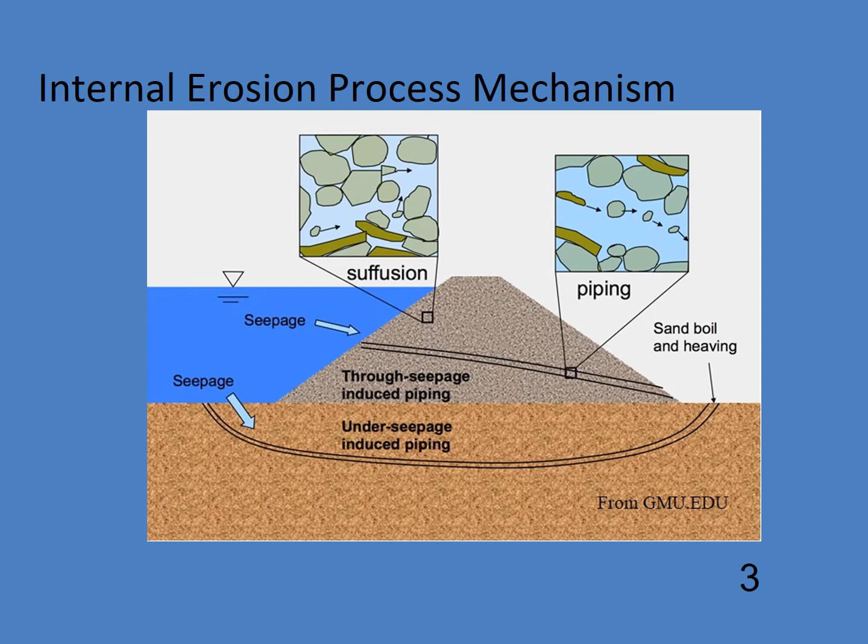Even though piping starts at the micro scale, if the problem is left unattended, the consequence is not ignorable. As you can see, it eventually causes serious damage to the dam structure, even total dam structure failure.

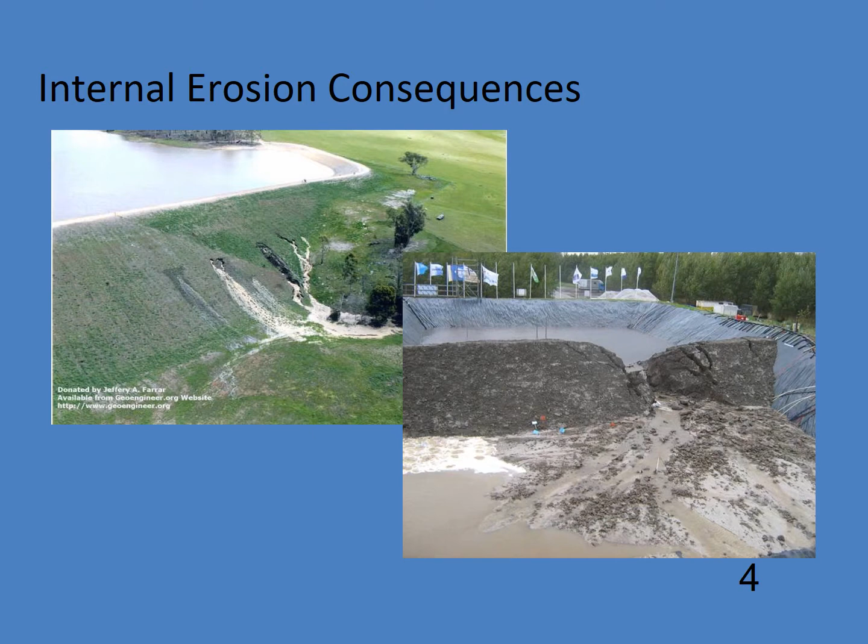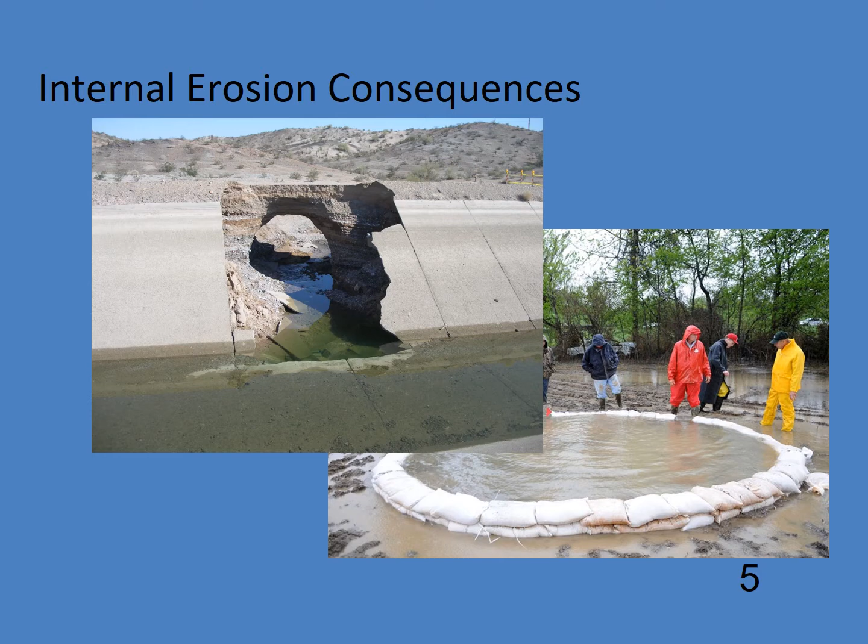Piping problems are also feasible underlying the alluvial soil strata, which eventually causes significant impact on the stability of the dams. So if you find some puddle or boiling situation at the toe area of a dam, you should take immediate investigation over the piping process.

So what material properties impact internal erosion? Piping starts from suffusion, and suffusion is also called the self-segregation process. Those processes relate to the particle size distribution and the relative density of the site soil.

From those two input parameters, you can calculate the constriction size and the maximum conduit size, in other words, the piping flow channel size. From comparing the erodible particle size and the conduit size, you can calculate how much particle remains and how much fine particle is eroded out after the piping process. I'm going to explain the definition of constriction size and maximum conduit size in a later slide.

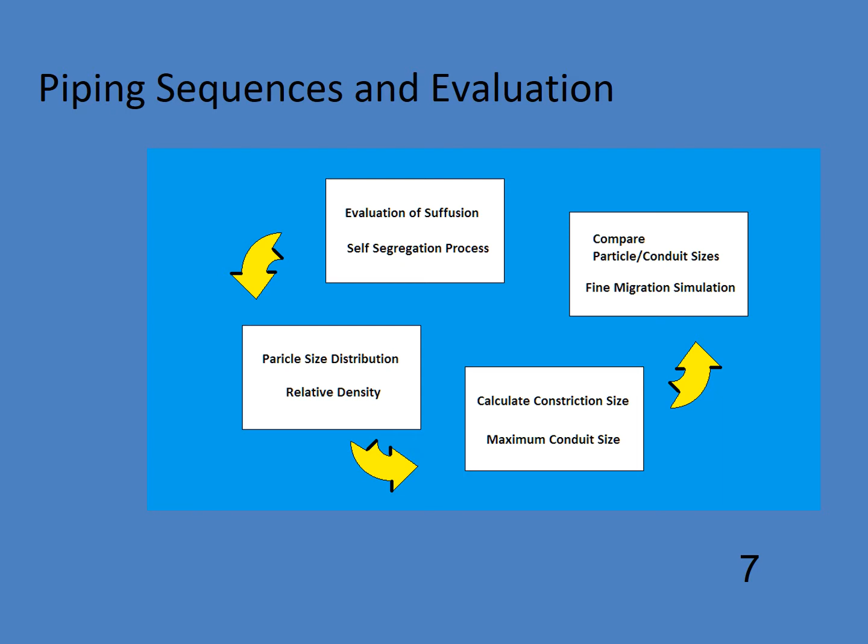In 1985, Kenney and Lau suggested design criteria for how to estimate internal soil stability. They proposed the criteria H equals 1.3 times F, where H is defined as the difference of a fraction corresponding to 4 times D and the diameter D.

As you can see in the green and orange gradation curves, that relationship can be plotted in the F-H diagram, and F and H are consistently above the 1.3 times F criteria shown in the red line. However, the blue gradation curve, which is a better graded grain size distribution, shows that F and H fall below the criteria at a fraction above 15%. So this blue gradation curve represents what we call internally unstable soil.

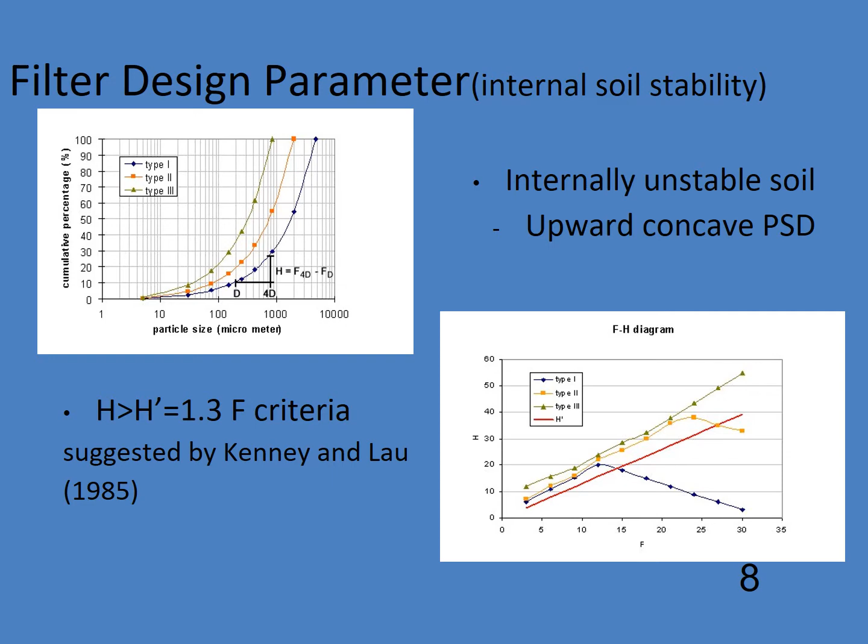Kenney and Lau proposed this criteria based on their laboratory tests on many non-cohesive type soil gradations. From the right-hand side graph, the F-H diagram result consistently shows that relationship is always above the 1.3 times F criteria.

However, internally unstable soil falls below that criteria. I want to make a note that their test was always performed under densely compacted conditions, so we need to figure out a methodology for how to evaluate internal stability for loosely packed conditions.

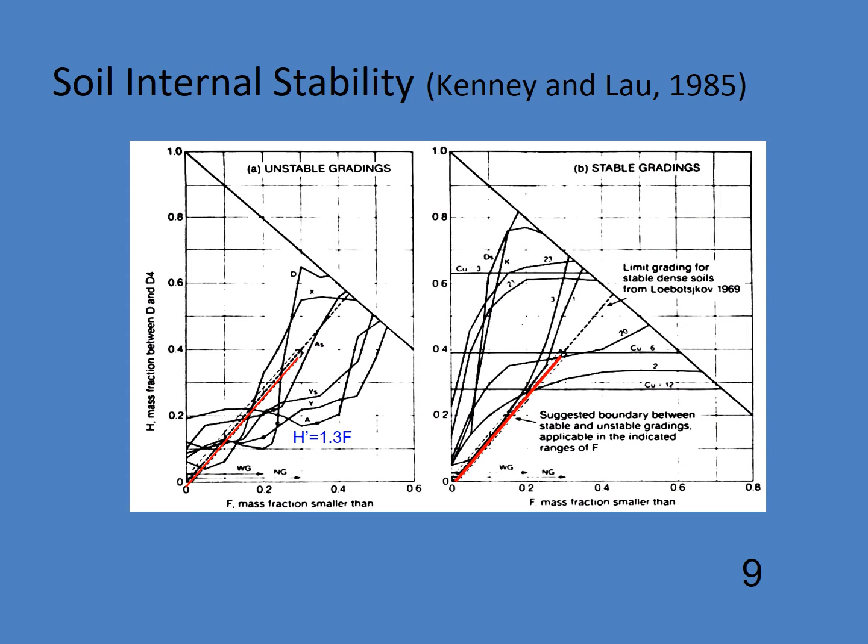Relative density is another important parameter to be considered in piping risk assessment. When you build an embankment dam on the rock abutment side area, the new embankment will start settlement from the lower portion of the dam due to its own self-weight. But the crest zone of the dam area will be sustained by the supporting bridging impact from the abutment rock slope.

So what happens in the middle zone if the top portion is sustained but the lower portion settles down? The middle portion will be susceptible to piping flow channel generation because the relative density is decreased.

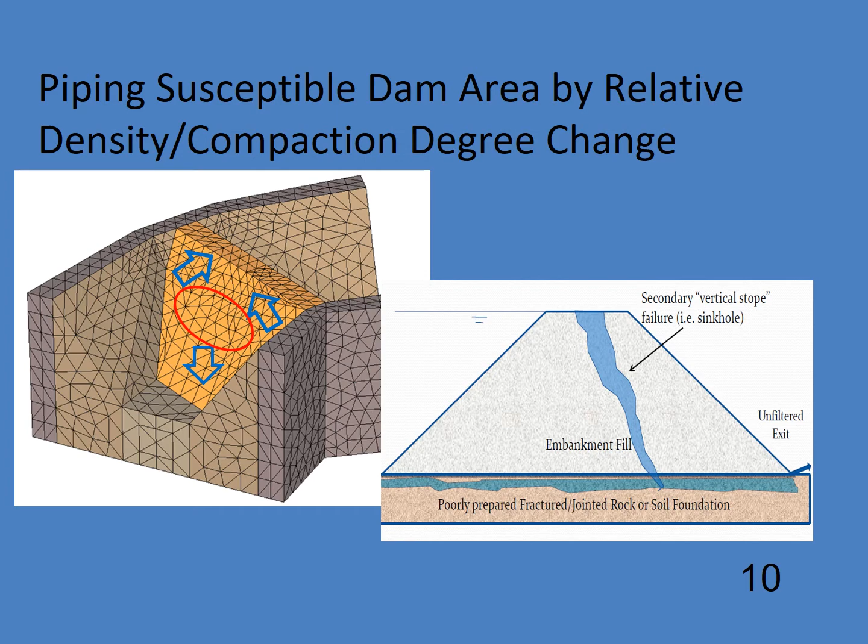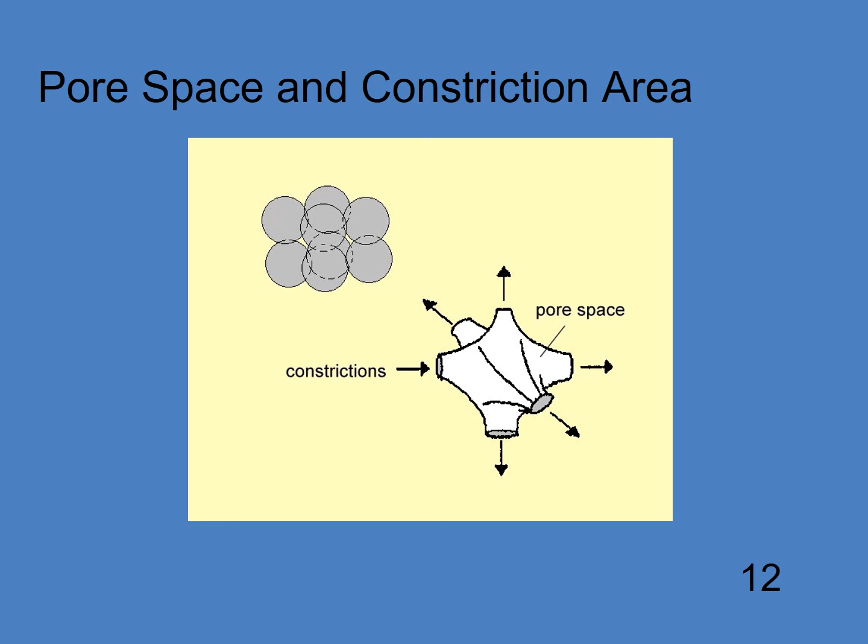So how to derive the constriction size distribution from the soil particle size distribution? The first step is to evaluate the effective particle size distribution, which is closely related to describing the constriction size of the pore structure.

You need to take an integral of 1 over x, where x is the particle size, powered by beta. The exponent beta value ranges from 0 to 3. Beta equals 0 means the mass-based particle size distribution, and beta equals 3 means number-based particle size distribution.

A Swedish researcher investigated through laboratory testing and found the closest beta value describing the constriction structure of the pore. From his study, he concluded that beta is close to 1.

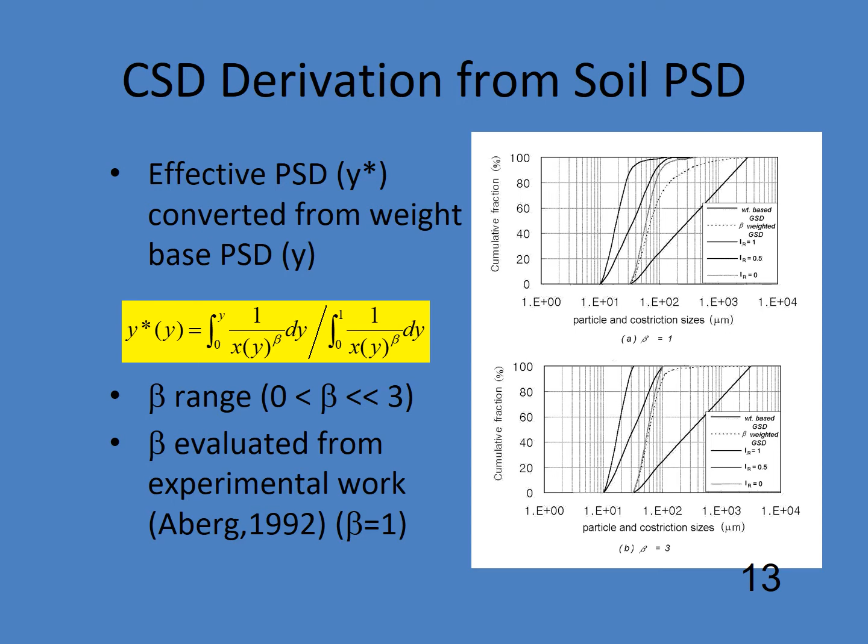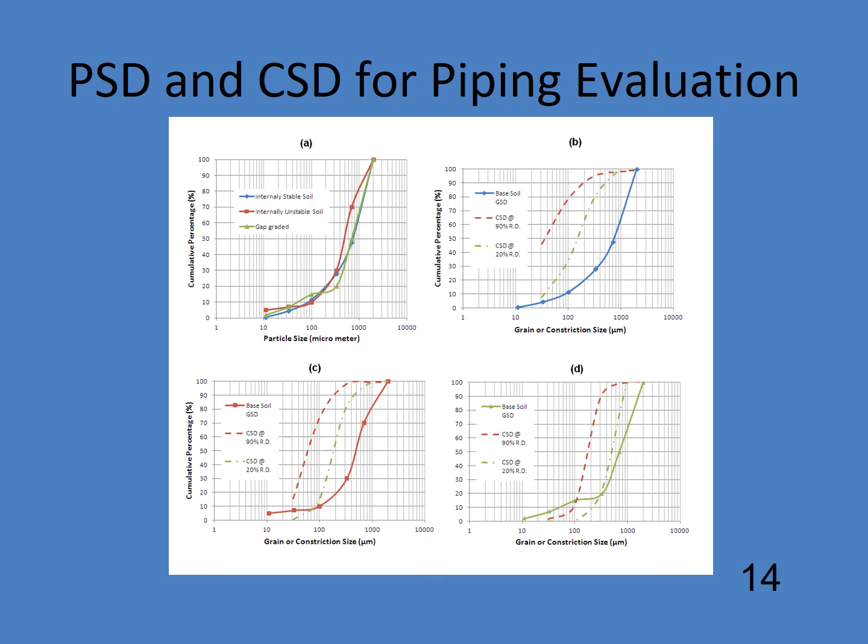For the passing probability analysis, you can estimate the piping flow channel size. If you have these types of solid line particle size distribution curves, you can derive a constriction size depending on the relative density, and estimate from the constriction size curve the matching 20%, 28% of corresponding constriction size that will produce the piping flow channel size.

Each case corresponds to densely compacted and loosely packed conditions. The loosely packed condition definitely shows much larger fine particle migration happening after the piping process.

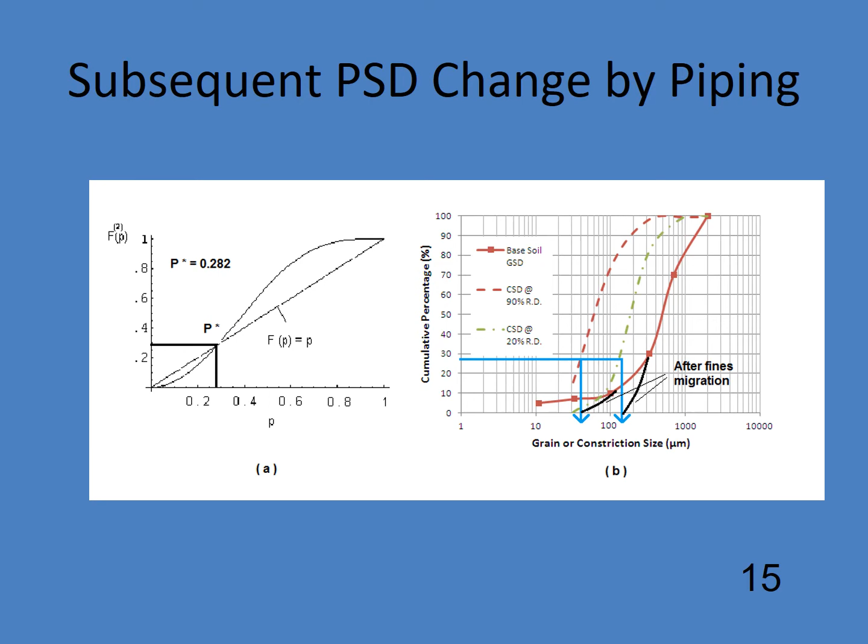We can call the suffusion in the micro scale as piping, because piping is a continuous process of development, enlarging in size and developing from the downstream to the upstream.

So we should investigate whether this fine particle migration is successfully progressed as the analysis domain is increased.

Even though suffusion started from the micro scale in the pore structure unit, it depends on the accessible constriction locations, and this determines whether this fine particle migration is successful or whether it will stop.

From the renormalization technique, we can evaluate the piping continuation probability. So bottom line, we need to find out the scale invariant effect of the pore structure to associate it with piping development.

From that study, we can evaluate that the critical piping flow channel size corresponds to 28% of the cumulative constriction size.

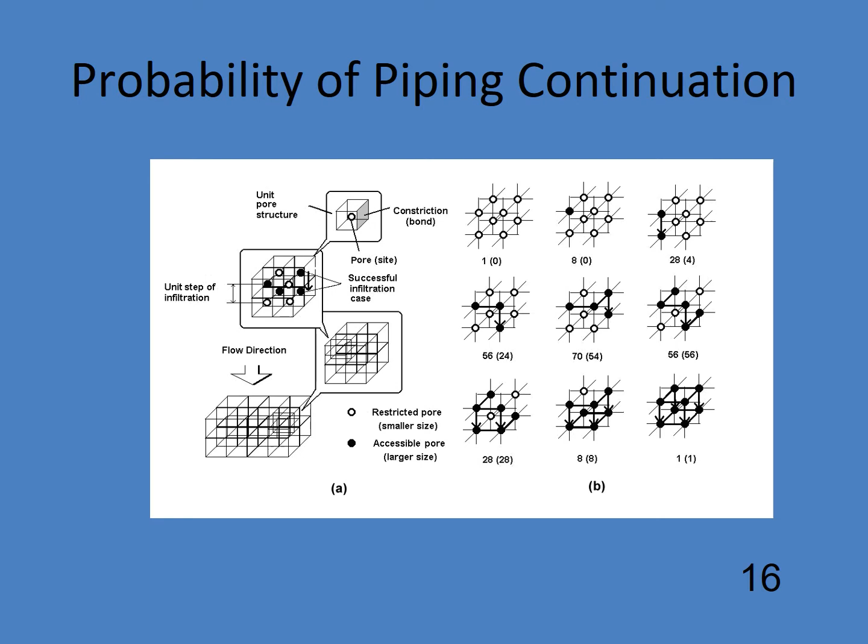From now, I'm going to briefly show the program. From this probability model, we can estimate constriction size and compare it to the original particle size curve, to calculate the fine particle mass fraction eroded out from the piping process.

This is the first example I'm going to introduce. This program has two input sections: one for the base soil grain size distribution, and the second input section is for the sieve size. The sieve has a percentage opening area and also its opening size itself.

First thing is to make it 0, meaning your sieve is closed, so you just examine the self-segregation process. No fine particle is allowed to pass through that sieve. You can erase that and plug in any number, depending on the passing curve, and generate the curve, eventually getting the constriction size distribution from the calculation.

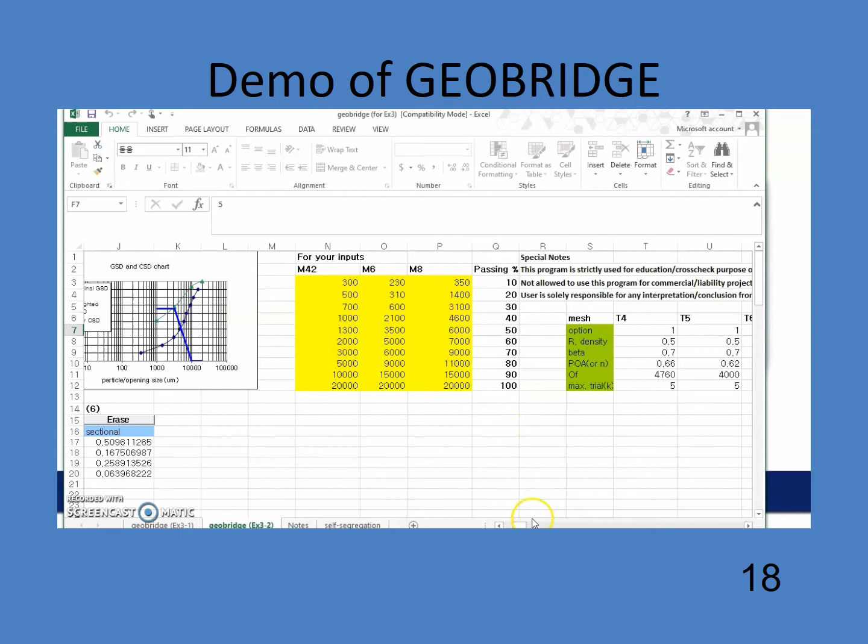This automatically changes and generates the grain size curve, the original, and then you apply the opening size here, the first M42. Now you apply this number, and you just change also relative density.

If 0.2 is very loose, maybe 0.9 is actually very dense. So first, you apply loose at 0.2, and you can calculate, and you will get that this type - all the fine particle passes through. So it doesn't reach some kind of bridging formation.

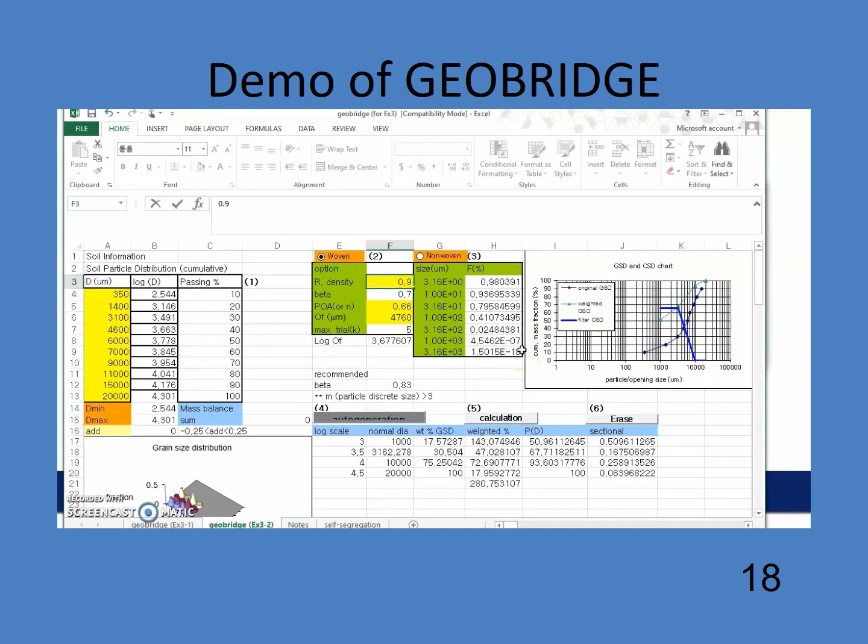If we increase to 0.9 relative density, let's see how it applies differently. You will get that, by chance, the fine particle is less reduced and sustained - one is a kind of interface zone, and the second is the upper soil upstream area. So you can see a progression here.

Let's just erase again and do the calculation. Yeah, it's the same conclusion. So eventually you get these types of measurements - the weight fraction of each sub-layer. So what percentage, like 25%, of the soil is eroded at the first layer, and close to the original point is just 4% migration.

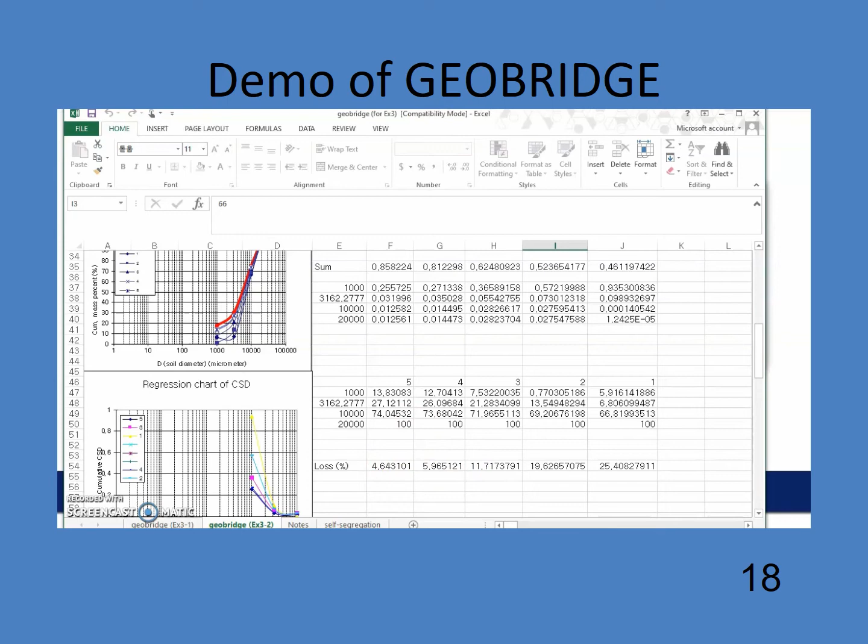So what is the reliability analysis, and how do we evaluate the internal erosion risk? As many of you already know, the LRFD - load resistance factor design - methodology compares the data distribution of load and resistance, not comparing two deterministic values.

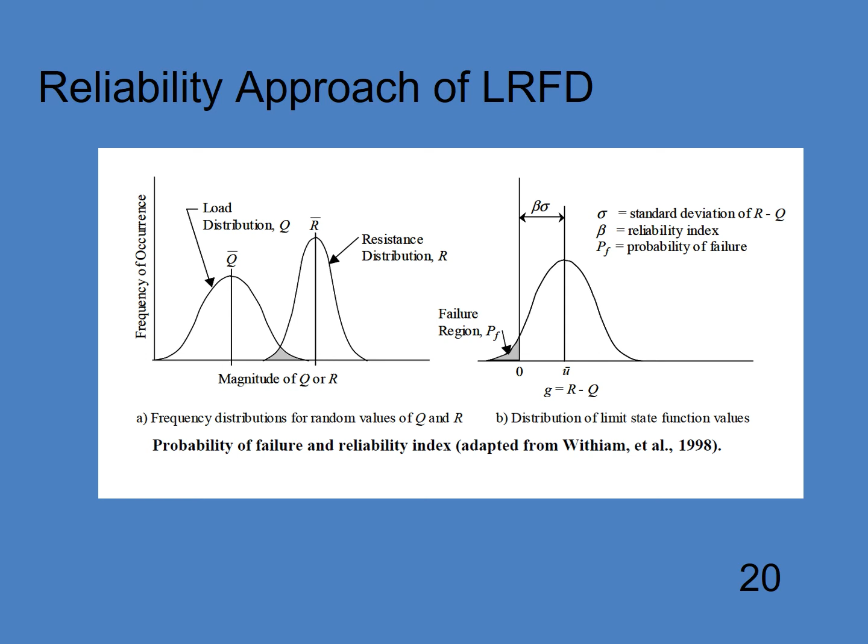If you apply the same scheme to the piping problem, the resistance side compares the erodible particle size distribution, and the load side compares to the piping flow channel size. So if piping flow channel size is greater than erodible particle size, or particle size is smaller than the piping flow channels, that will produce the piping problem, right? So that overlap gray area will represent the probability of failure at the piping risk.

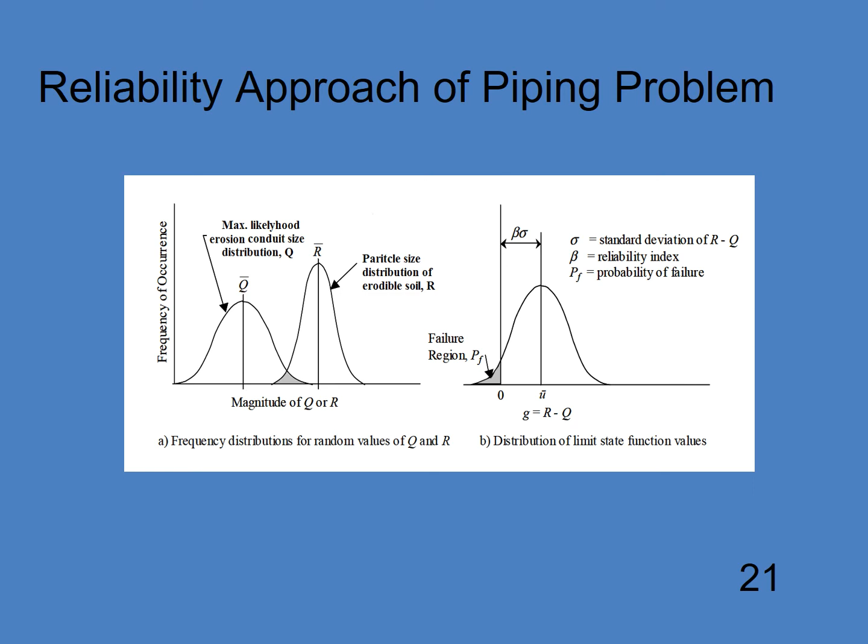As we already know, well-graded soil is more susceptible to the piping problem. Well-graded soil usually shows a wide range of piping flow channel size, and also erodible particle size distribution. This wide range of data distribution increases the overlap area in the probability of failure compared to the narrow variation of the piping flow channel and erodible particle size.

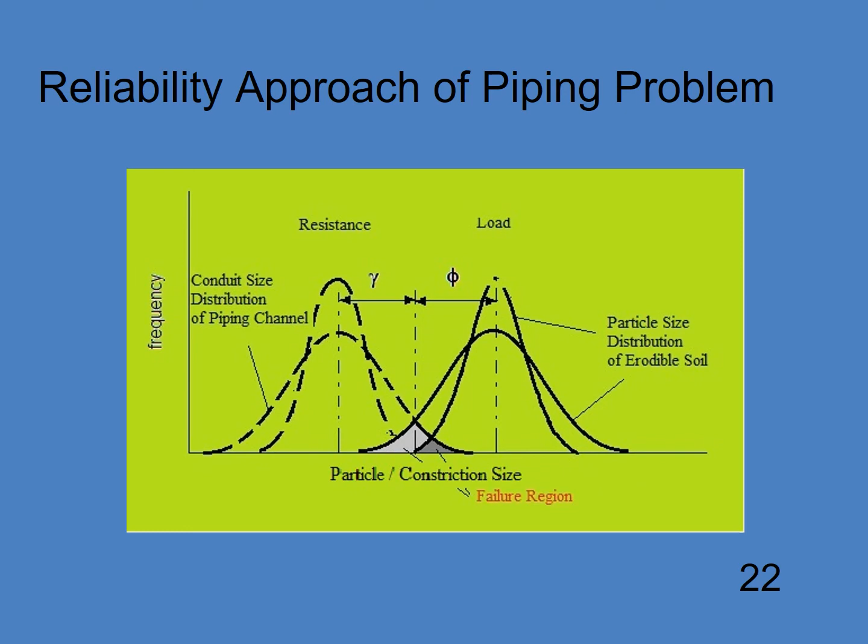Poorly graded soil also produces some piping problems if that graded soil is poorly, loosely packed. In those loosely packed conditions, the piping flow channel size will shift to the right-hand side, toward the erodible particle size. So that creates some overlap and the probability of failure.

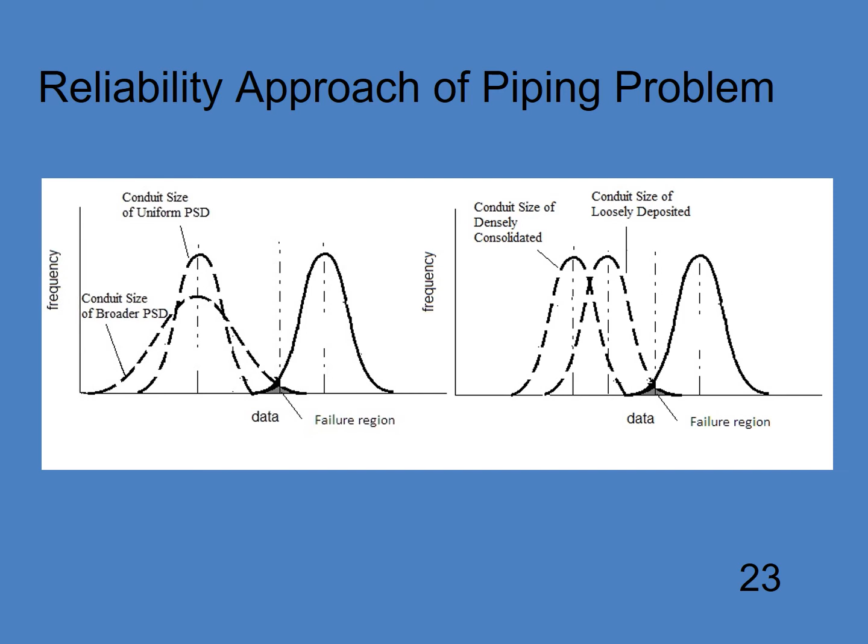So from now on, I'm going to briefly introduce a case study on how to use the probability method to evaluate the piping risk from site investigation field data.

So I took the example from the FEMA manual, and an embankment dam is built on two alluvial soils, soil 1 and soil 2. You can assume three different piping flow channel paths. Path A directly through the dam structure, path B through alluvial soil 1, and path C follows alluvial soil 2.

So we're going to examine the piping flow channel, the piping risk at each flow channel. Also, we can estimate the core erodibility through path B and path C.

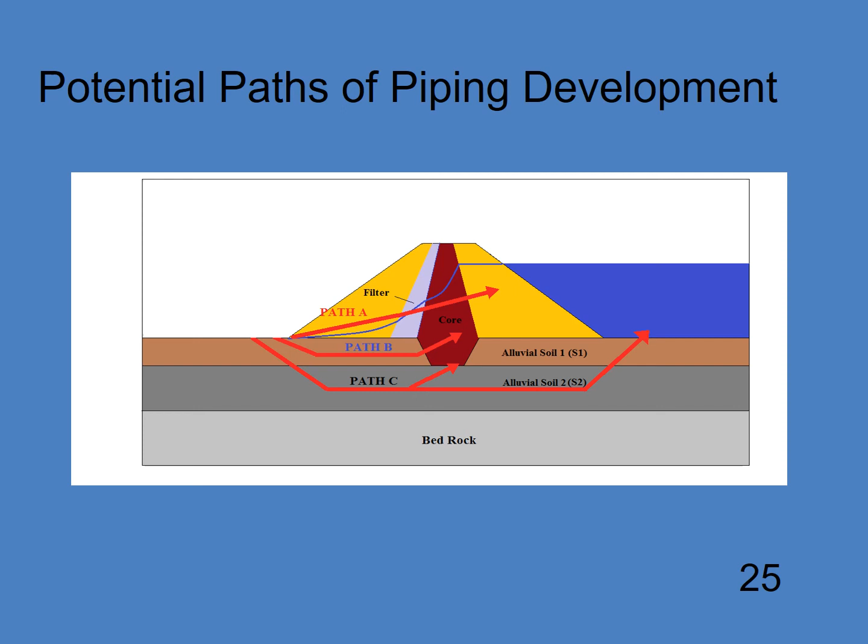The piping flow path A is a relatively easy problem compared to path B and path C. Why? Because the embankment backfill material uses pre-screening material showing relatively uniform gradation range. And also the dam structure's core is attached on the downstream area, we employ filter media

to reduce that piping problem. So for path A, I think the probability of piping risk is relatively small compared to path B and path C.

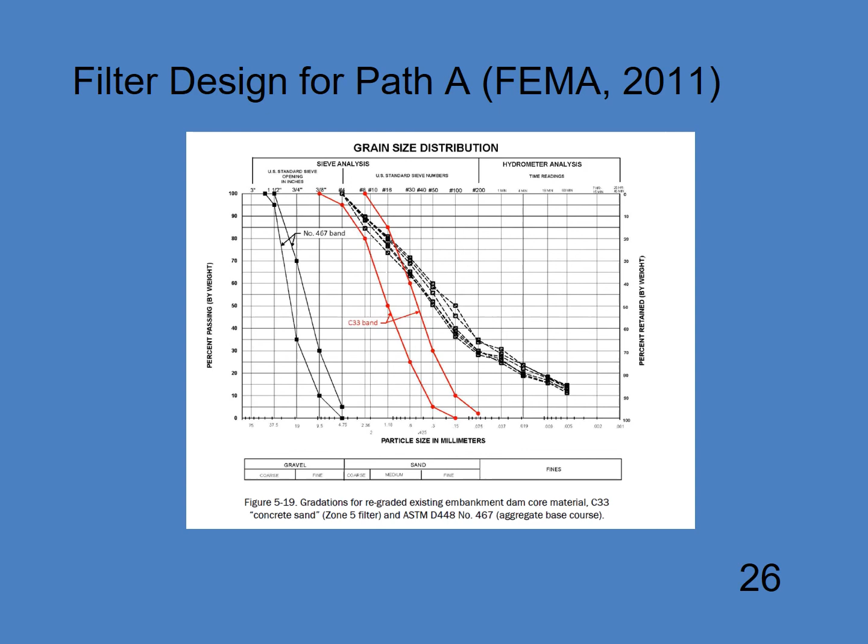So how can we evaluate path B and path C? Because the alluvial soil strata S1 and S2 show a wide range of particle size distribution curves, it's very complicated to evaluate the piping risk for these types of wider variety of particle size distributions available.

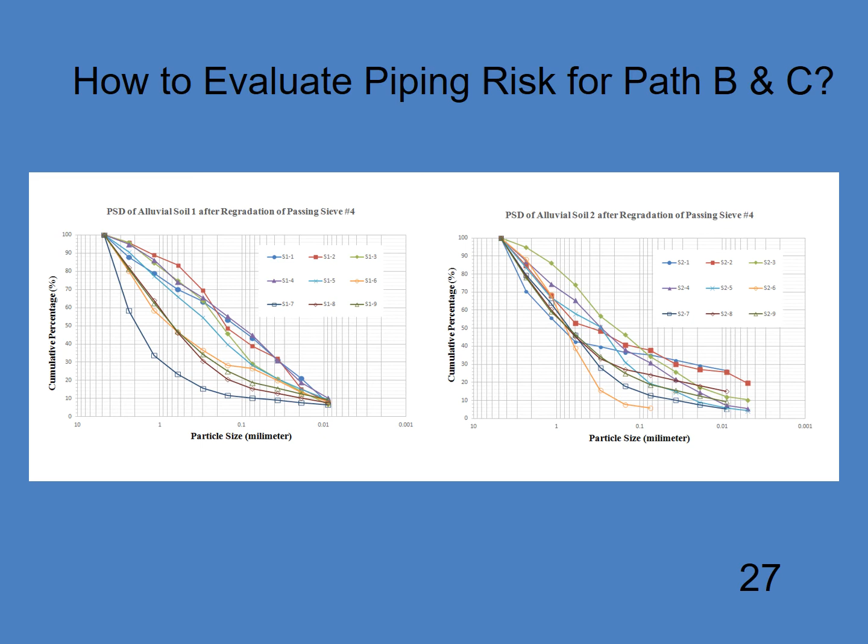The first thing to do is estimate the erodible particle size. You draw a horizontal line, and that line encounters each individual particle size distribution of the alluvial soil gradation curve. You collect those crossing points and gather them to make the erodible particle size corresponding to 20% and 10% of the mass loss.

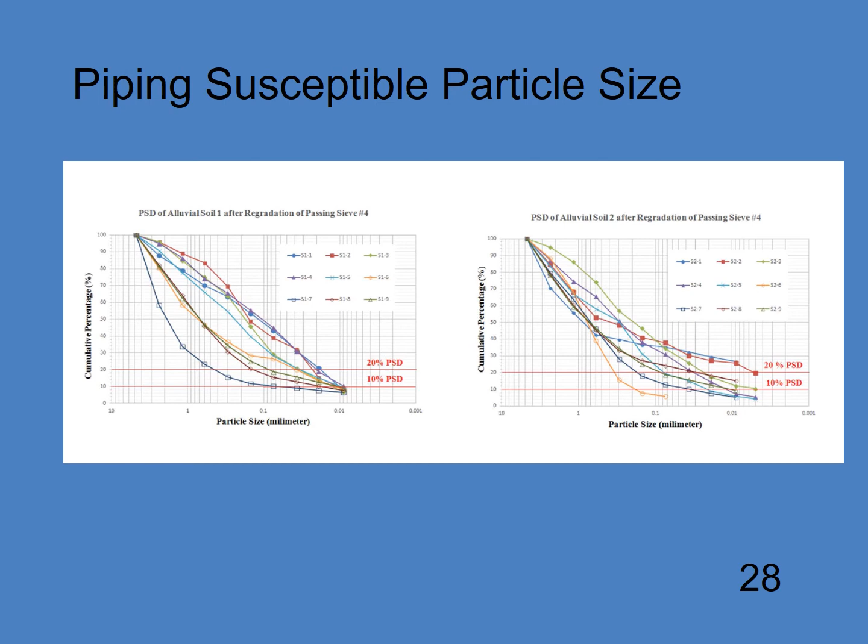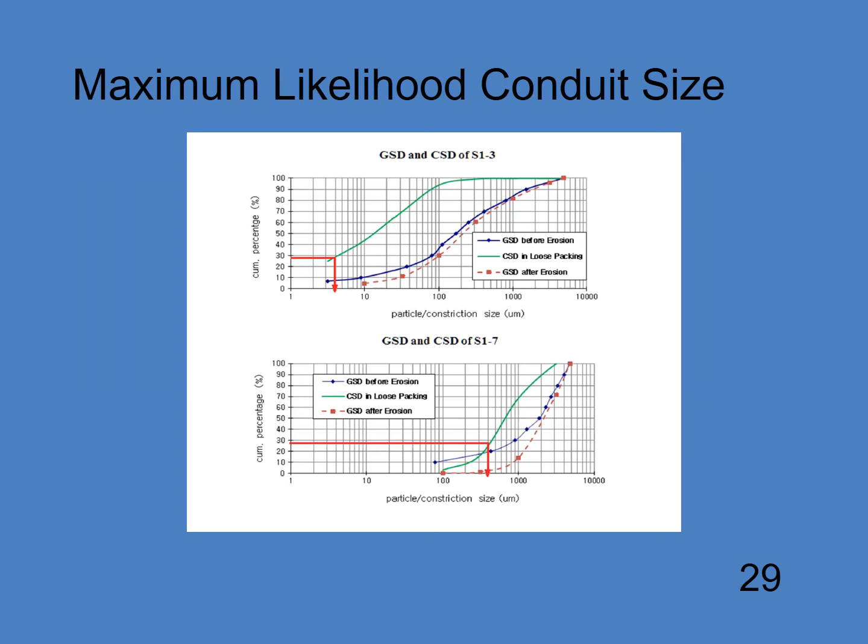You can apply 9 different particle size distribution curves, and assume 2 different scenarios: loosely packed condition and densely compacted condition. For each scenario you can evaluate the piping flow channel size, and also the associated fine fraction, the mass fraction that is eroded out.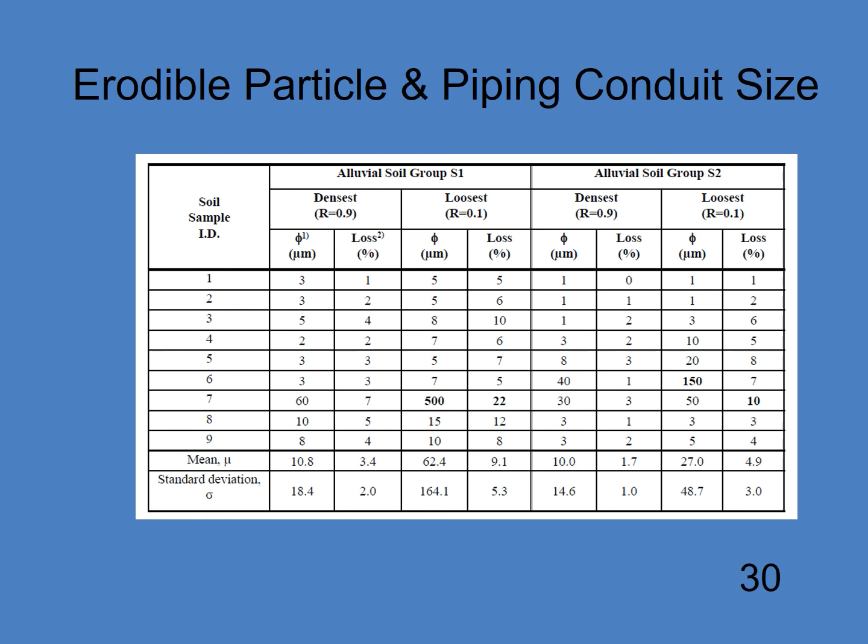And you evaluate all this collected data, then the mean and standard deviation for describing the piping flow channel size. As I mentioned earlier, you evaluate the risk of piping failure by comparing two data distributions: erodible particle size and piping flow channel size.

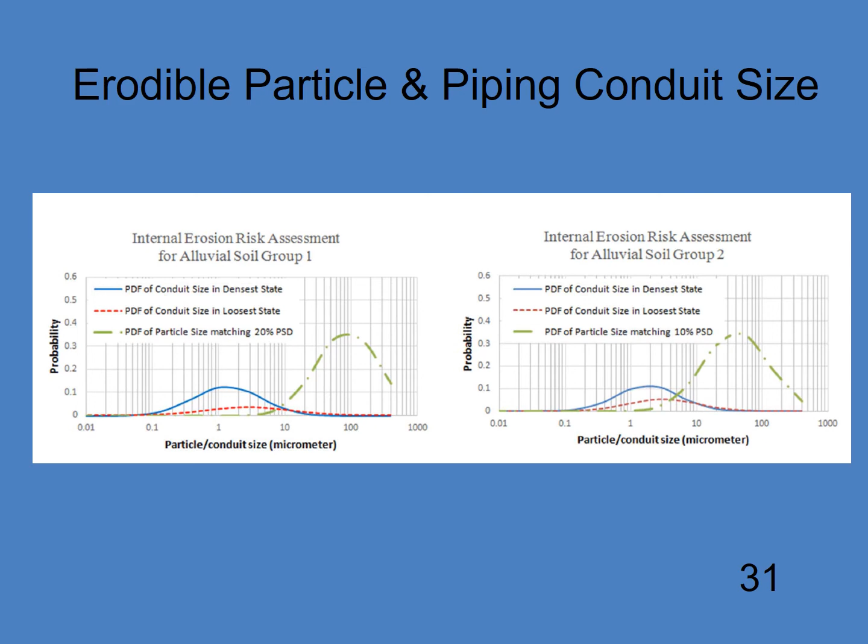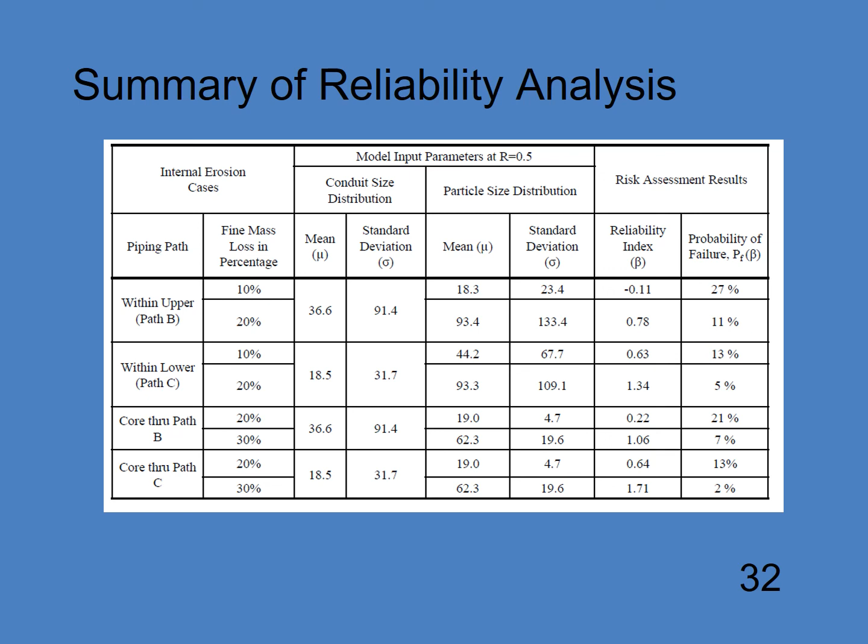So in conclusion, this reliability and probability approach of alluvial foundation soil, based on field lab test data available from site investigation before dam construction, could evaluate the risk assessment of piping susceptibility more objectively.

The random and non-uniform features of alluvial soil, showing a wide range of gradation and consolidation degree, can be depicted and compared with stochastic parameters presented as mean and variance of erodible particle size and piping flow channel size.